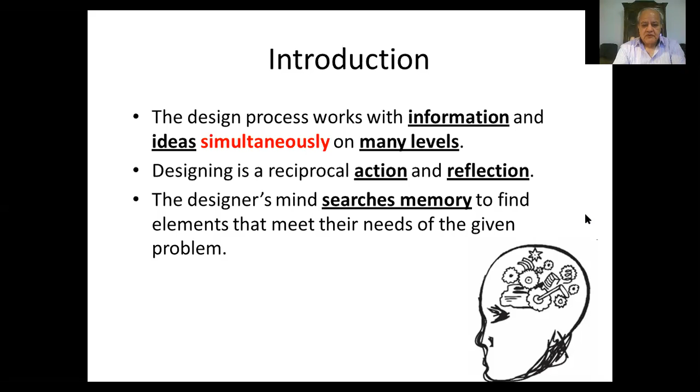So while we are working on the conceptual stage, it's like a puzzle. We never know what the building will look like or the idea will look like at the end. It's pieces of a puzzle that we try to put together and try to find what brings them all together in a meaningful way. How do they fit together? What are the missing pieces?

Do we have missing information about the site? We have missing information about the program. We have missing information about the client. If there are missing pieces, you will never get the full picture as you like to have at the end.

As I said, we go through different stages of design, and during the stage of the synthesis, this is where ideas are formulated. So the first thing is that we collect information about the site, the program, the data, examples, and then we go to analysis stage where we analyze this information and find out what will impact the project most and identify what are the objectives that we want to achieve. And then the synthesis stage, where all this information comes together in the form of the concept.

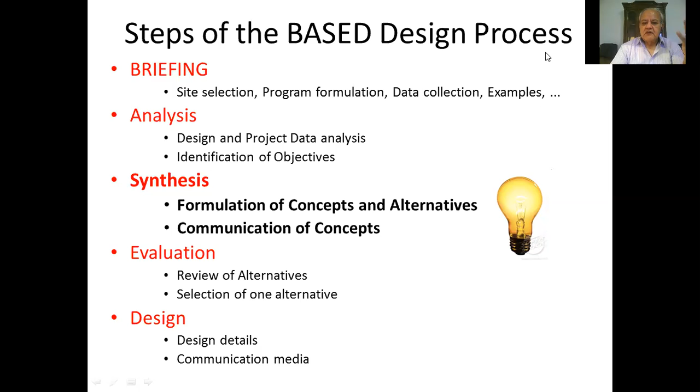But the key element in our work is synthesis. If we take the first letters of each of these stages, we'll find that they create the word BASED. So we can think about this as a BASED design process. BASED: briefing, analysis, synthesis, evaluation, and design.

So the BASED design method that we talk about starts with a briefing of collecting information about everything, and analysis, synthesis, evaluation. As we said before, we analyze the program, the site, the goals, the alternatives, and then we go to the synthesis stage, where we develop solutions and concept, form, and space, and provide that in a preliminary or schematic design. You can use models, of course, to illustrate your ideas. You can use some renderings and so forth.

And evaluation of these concepts to achieve the design. So analysis, synthesis, evaluation. If successful, you go to design. If not successful and none of the alternatives satisfies the client and the users and the needs, then you go back to the analysis stage. What is missing? What we need to do more, and how to improve our base knowledge so that the synthesis is better and complete.

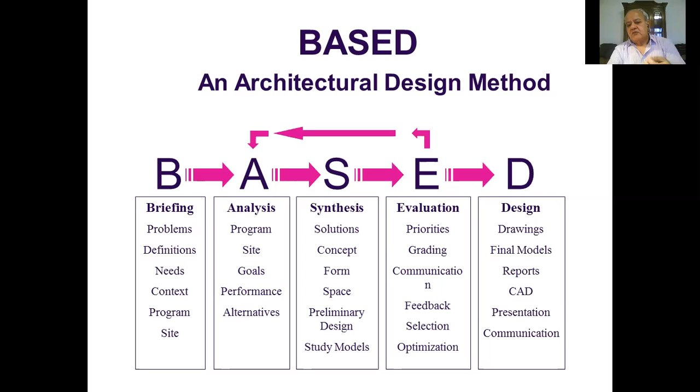So it's not a one-shot process. It's, as we said, action and reflection, until we reach a satisfying concept. Then we proceed to the design stage.

Concepts can come from different sources, unlimited. They can come from ideas of balance, if you are designing a courthouse, for example, or a governmental building or something. So the ideas of balance are represented in symmetry, nature, tools, ratios, level, justice, and can be a source of ideas for your concept. If you want to illustrate grace, maybe you look for how the dancing happens, flight, skills,

fluidity, focus, effort. If you are looking for complexity, you can look at integrated circuits of a computer chip. You can look at politics, ecosystems, planetary movements, fractals, music. If you are trying to illustrate knowledge, through learning, experience, crafts, skills, communication, memory, mastery.

So ideas can come from unlimited sources. And they must be related to your client interests, your site, your ambitions, dreams that you are translating for the client. So the ideas can be intangible, something very highly conceptual, as you said, ideas, human conditions. They can be tangible, coming from a certain object, and they can be combined and coming from different sources.

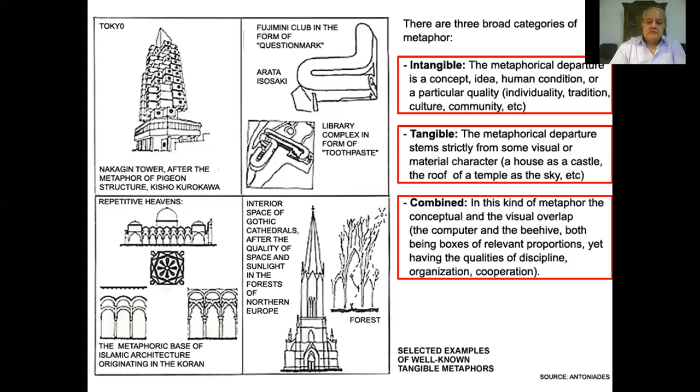So as we said, the ideas can be coming from a very intangible level, and they can be coming from very tangible, like imitating a certain shape or form, or a combination between the two. So you have to open your mind to everything. Try to find ideas from as many sources as you can, and sketching. The secret of concept creation is sketching.

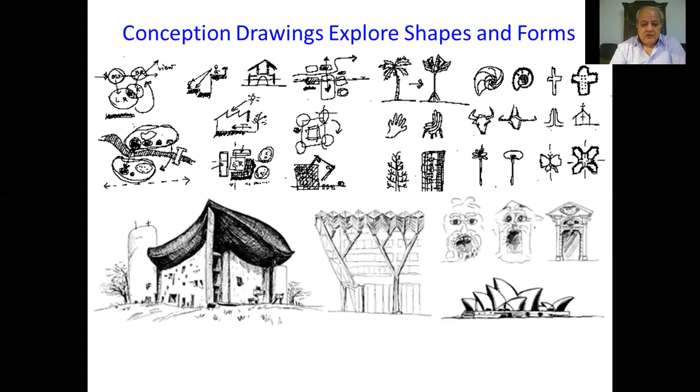If you have good sketching skills, this is very valuable at this stage, to keep sketching your ideas. Most successful projects were coming from sketches. Also, having a mood board is important. Collect some pictures, images, materials, so that you can provide this as inspiration for your client.

As we discussed yesterday, the site can be the main source of your concept, depending on the topography, climatic conditions, geography, demographic conditions, geology, and many elements. So your investment of time in the site analysis, site survey and information collection is very critical. Your idea might come only from the site, to relate it to a certain cultural background or buildings around you or whatever.

So you have to weigh each determinant and see what is the strongest. Is it the site? Is it the program? Is it a philosophical idea? Is it an intention? Is it the artist's work, him or herself? So there are many sources. So the site itself, the site conditions, the topography can be a very important determinant in creating the concept.

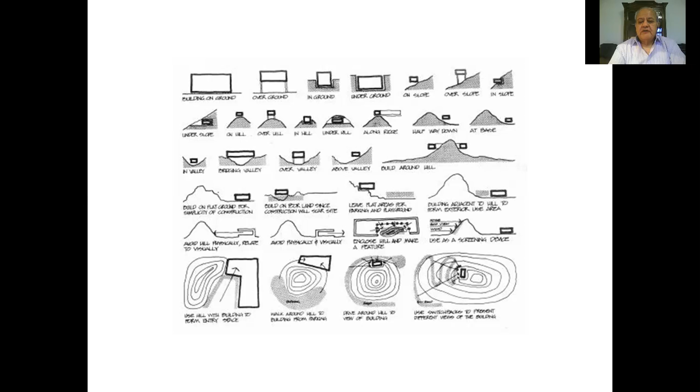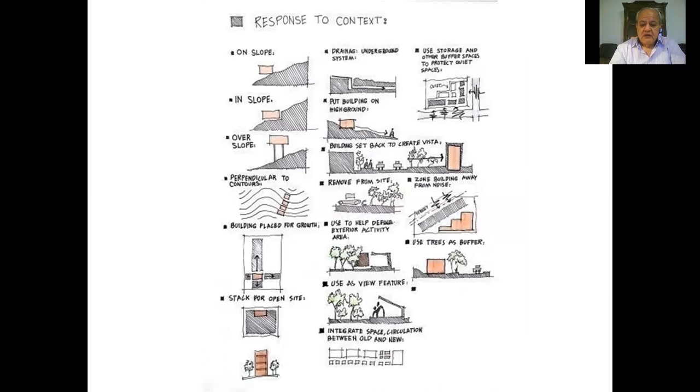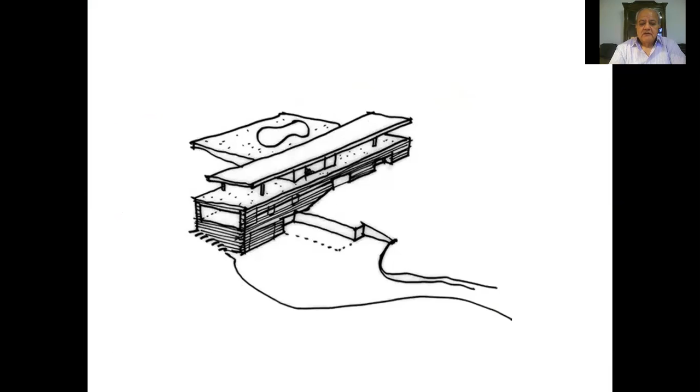How do you respond to the site conditions, the contour lines? Are you going to build on the slope, in the slope, inside the slope, or over the slope? Do you have vegetation around? How are you going to deal with that? So the site itself and its conditions can be the main source of the main concept generation. If you have excellent views around, maybe you need to have your project open to the nature around you and integrated with the topographic conditions.

So the influences on the design can come from different sources, and you have to treat each project separately. Every project situation is different, has different requirements, different limitations based on the client, the budget, the program, the cultural, environmental, technological, aesthetic context. Every project must be treated individually, not copied from other projects. So you have different challenges and opportunities.

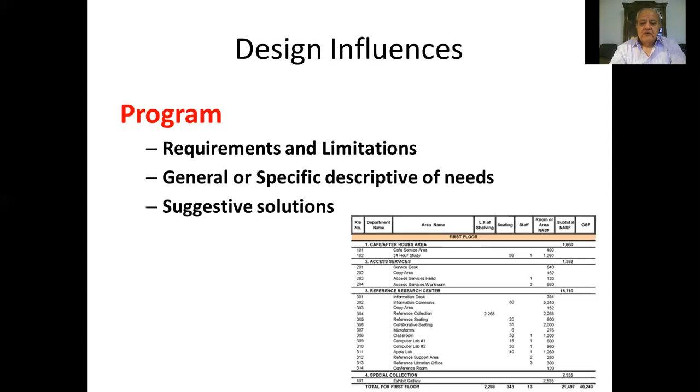The program can be a very important influence on the design. What are the requirements, the limitations, the areas? Do you need long span structures? Do you need high-rise structures? They can provide you with solutions directly from the program requirements. If there is a strong community around the project with specific requirements, you need to have meetings with the community itself. Community leaders, focus groups can provide you with important information and activities.

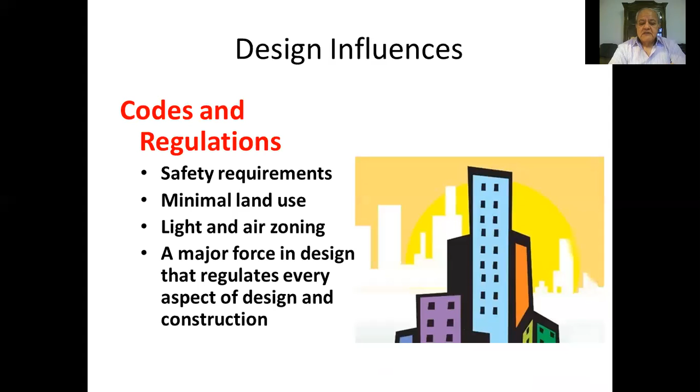Codes and regulations, of course, have major influence on the design. What is the allowed area for construction? How many floors? Setbacks? FAR, how many square meters can I build on this site? Parking requirements. All these will have major influence on the design.

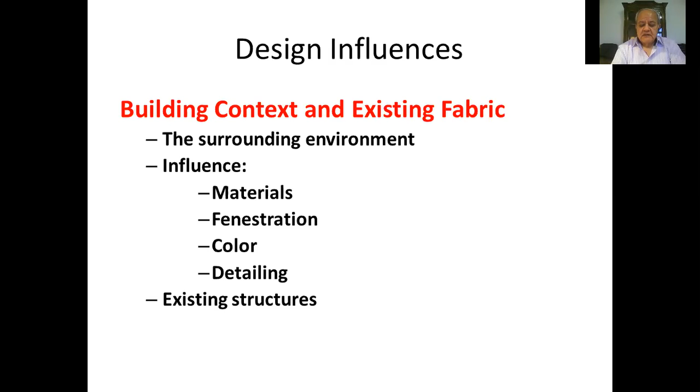Where is the building located? You need to understand what is the existing fabric around the building. What kind of buildings? Traditional, modern. How do you relate to them? Are you going to integrate with them, so you do something similar, or make something different? And why? You always have to think about why you want to do this. This will have influence on your selection of materials, fenestration, color, details, and so forth. So you have to understand the context.

As I said, site and climate are important considerations. The site has its physical characteristics, and the climate: wind direction, solar orientation, temperature, humidity, precipitation. How do you deal with these climatic conditions? Do you have snow? Do you have rain? Do you have sand?

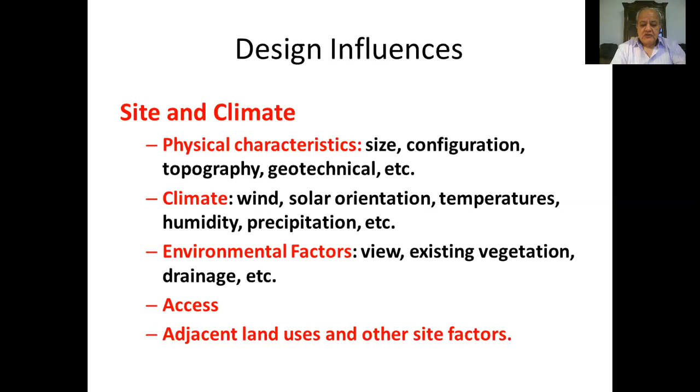The second item are the environmental factors. What are the views around you? Which direction? Do you have existing buildings or existing vegetation? How do you reach the site? What is the access to the site? Adjacent land uses. Many items coming from the site.

Building technology is also a critical factor, because now buildings are not only walls, floors, and ceilings. They are like small machines. We have air conditioning, we have lighting, we have internet, we have different systems that are impacting our building design from the beginning. And these are identified usually in the beginning of the project, in the briefing stage.

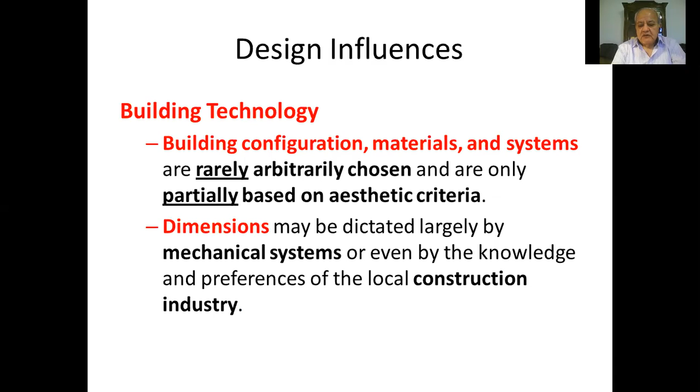The client might tell you about specific requirements. If you are designing a factory or a hospital or an airport, you have to consider all these building systems from the beginning of the project. Dimensions might be affected by the mechanical systems used, the construction systems required. Maybe the client wants to use prefabrication. Maybe the client wants to use standardized elements so that they reduce the cost. So you have to be careful about this.

Of course, the issues of sustainability, as we say, the 3 E's, environment, economy, and equity, are becoming major elements in the design now. And currently we can also add to it health, because health is becoming a major concern in any design, and that will impact the design industry in the future a lot. So you have to think about all these aspects of sustainability, and maybe the client will ask you to design the building from the beginning to achieve a certain sustainability grade, like platinum, gold, silver, or stars, or whatever. So you have to consider that from the beginning.

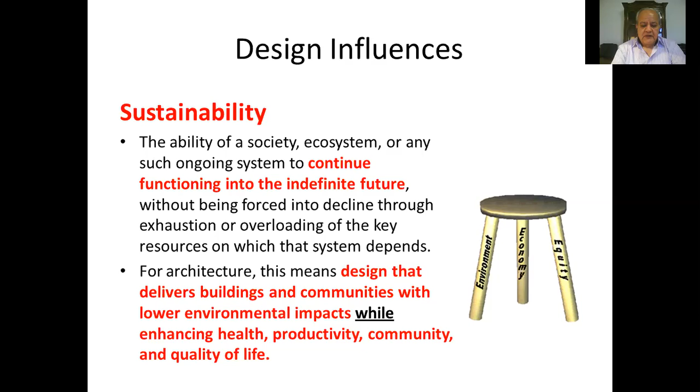Cost. Of course, in university, you don't think much about the cost. It's taken for granted, and you don't have to worry. But when you go to professional practice, you will find that cost comes sometimes the first item in the project. We have limited budget. Please reduce the cost. Don't make it cost too much. You will hear that a lot from your clients. So cost considerations are very important.

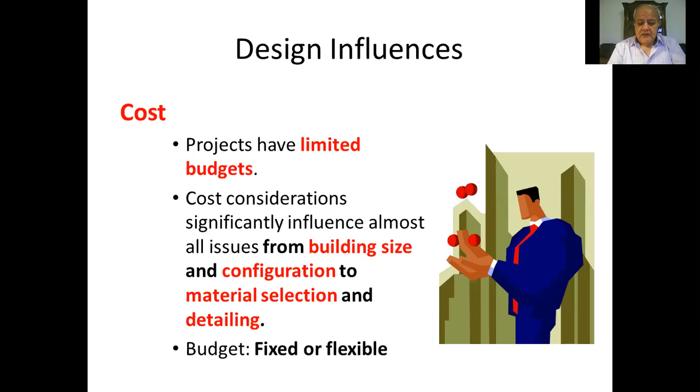You have to understand, does the client have a fixed budget or flexible, not open? No one has open budget. It's either fixed or flexible, so you can go up and down a little bit in the budget. Again, we want to stress that what you do in the beginning of the project impacts the cost a lot. You can optimize the cost of the project in the beginning, during the programming and the design stage, more than at the end in the construction stage.

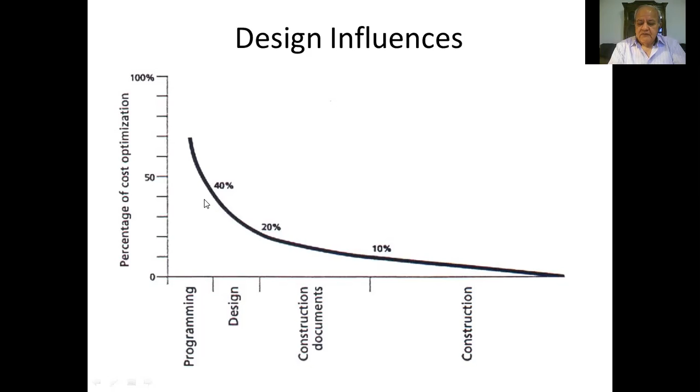So make sure that you spend enough time here, and the client should understand that the time spent at this stage is to optimize, not reduce. Don't use the word reduce. Use the word optimize the cost. There is always a cost. And we don't want to associate cost reduction with quality reduction. No, we want to optimize. We want to use the resources and the cost in a meaningful way so that we achieve the best results.

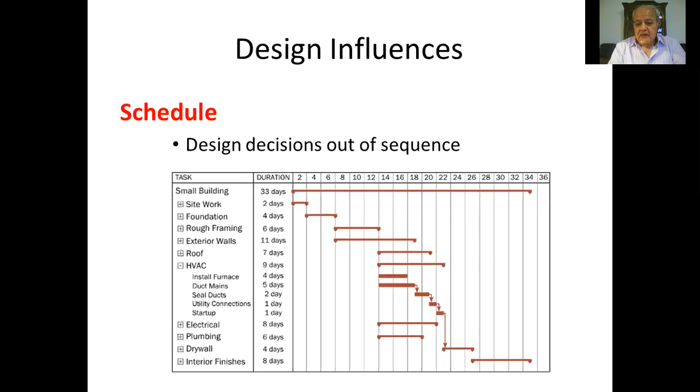Schedule. Sometimes you have a client who wants to build a school. So they want to start on a certain date, so that they furnish the school and start with the academic year. So you need to understand from the beginning, how will the schedule affect your design? When to start, what to do when, and so forth.

The client is always a major influence on the design. In professional practice, you always have to be communicating with the client. Don't disappear for 2 or 3 months and then come up with a good idea. It doesn't work. You have to be continuously meeting with the client during the design stage. Review your ideas. Make sure that you are in the right direction. Make sure that they understand the consequences of any design decision in terms of cost, in terms of time, in terms of complexity, and so forth.

There is no one good client. Some clients might come to you with a program and budget and all the objectives of the project, and they want you to just design. Others, they have no idea what to do. They might have budget, but they don't know what to do with it. So you need to find site and program for them and objectives. So there are different types of clients, and you have to meet the client several times in the beginning to understand what is the nature of this client and how you can work together to achieve the best results.

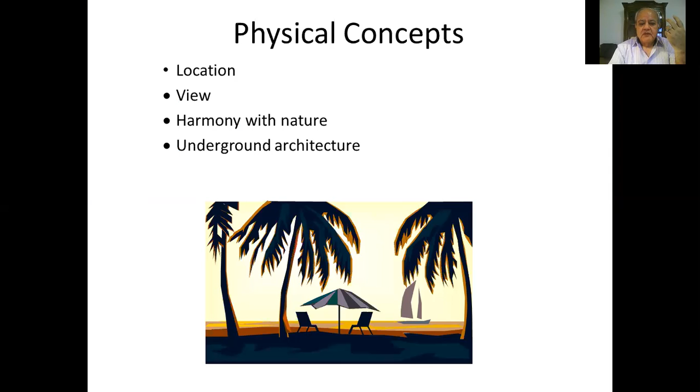How do we relate to the natural elements, to the views, to the architecture that is already there. Of course, there are many well-known sources of concepts from nature, from beehives, from seashells, from the sand dunes, from waves. All these are kinds of sources that are coming from nature. They can also be cultural. If you are designing in a historical site or traditional site, you have to consider all these elements.

Religious factors. If it's a religious building and has some significance, you need to think about the religious factors, the social factors, people who will be living in that area. Economic factors. What is the economic standard for the project? Is it a shopping center, high class or middle or low? How do you design for each one of them? Political factors. What kind of political statements need to be illustrated in the project?

Functional factors. You might have different functions. They have complex relationships, and you need to think about them. Spatial relationships might also be a source of the concept. What kind of spaces do you have? How do they relate to each other? How do you connect them together? Same level, or use different staircases and different elevations, different heights. Do you have the same height for all elements? Are they all 3 or 4 meters, or do you have areas that require 6 or 12 meters? So how do you bring them together?

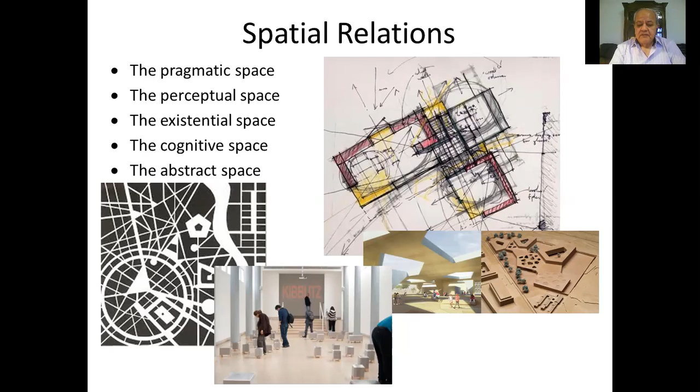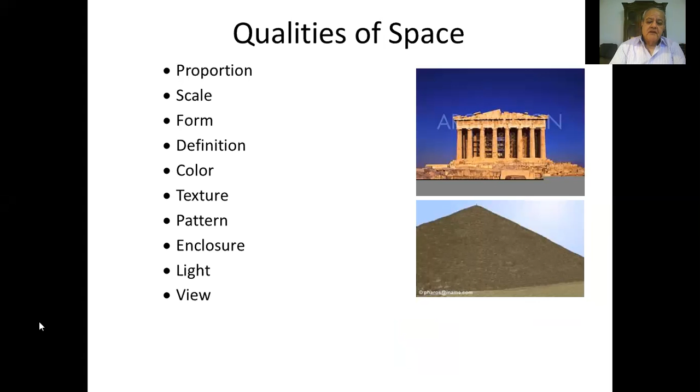We have different types of spaces. There is the pragmatic space, the physical space. There is the perceptual space. How will people perceive the space and walk through the different spaces? Existential space, cognitive space, abstract space. So all these are different ideas coming from the spatial arrangement. Of course, the space has qualities related to its proportion, width, length, and height, scale, big or small, form, definition of the space, the color, the texture. All these elements affect the quality of the space.

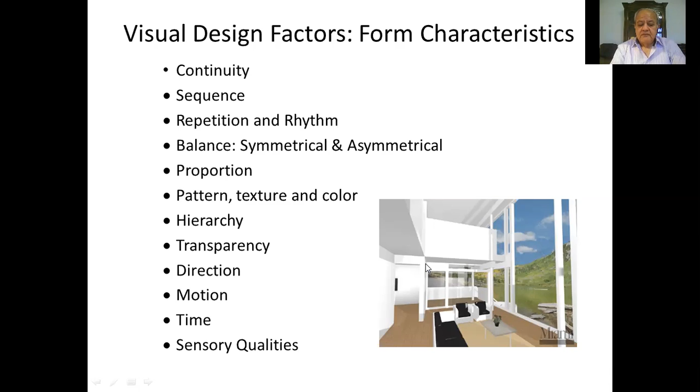The visual design factors. How do you put these spaces together? What is the sequence of the spaces? How do you provide continuity and fluidity between the spaces? Are they symmetrical, asymmetrical? Their proportion, are they all the same proportion or have different proportions? Pattern, texture, color of spaces, hierarchy, transparency, direction, motion, time, sensory qualities. All these are elements that affect the design.

We can also think about our visual perception. How do we perceive spaces? We have different theories of how we perceive spaces in the city, in the building, and in one room. There is the famous Kevin Lynch theory of the image of the city and theory of place, where he identified certain elements that allow us to understand or to perceive the spaces that we live in.

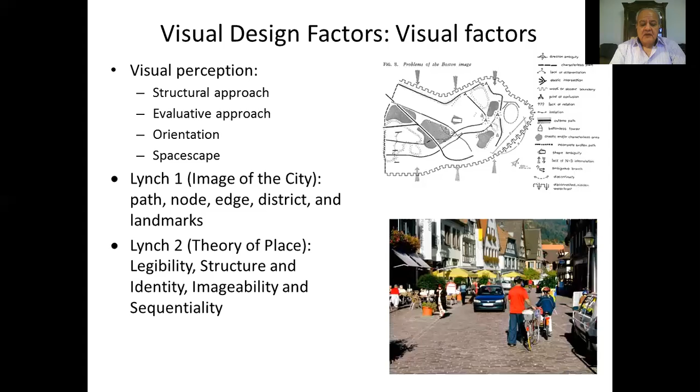Gestalt psychology or theory is very important for architects to understand how drawings impact how we see the world. The emojis that we use nowadays are also part of this. These elements, when they are arranged together, can create a meaningful symbol. Visual organizations, we all know the figure, ground, surface, edge, outline, object, things that relate the objects to themselves and to each other.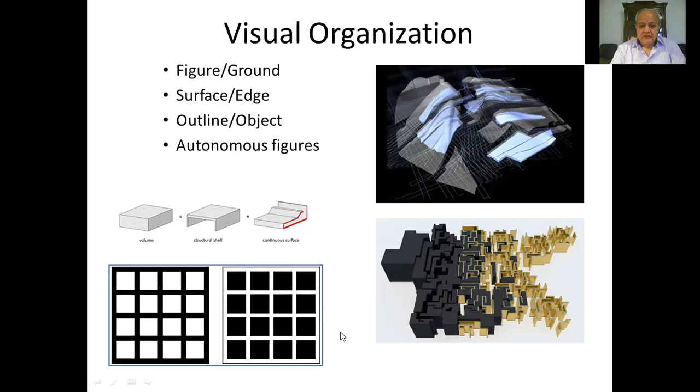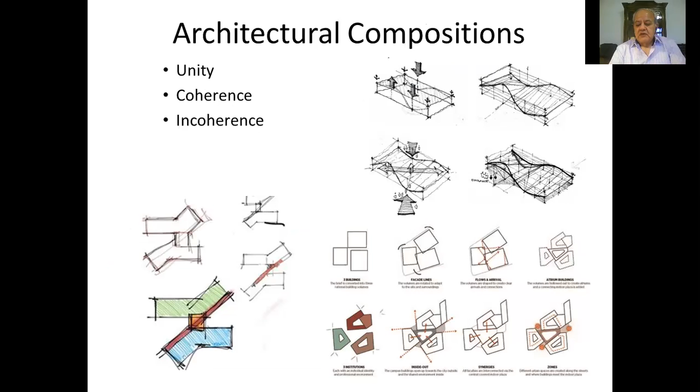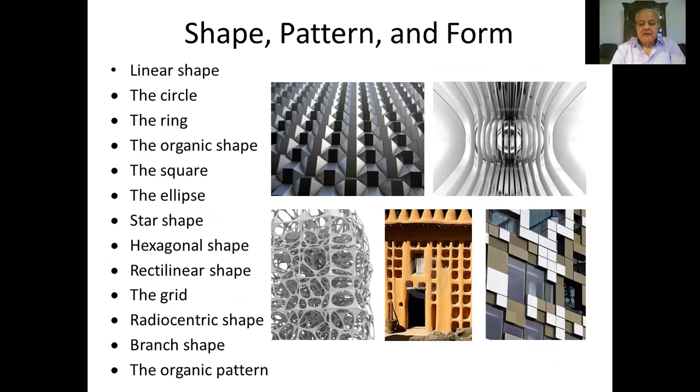We have architectural compositions. We can start from very pragmatic principles of architecture and start to manipulate the form to achieve what we want. We have linear shapes, circles, rings, squares, stars, hexagonal. All these are architectural principles that we can base our design on. The size: in the postmodern architecture era, we used to use the size and the scale as one of the elements of design. By changing the size that we are used to into something different, it creates a different experience.

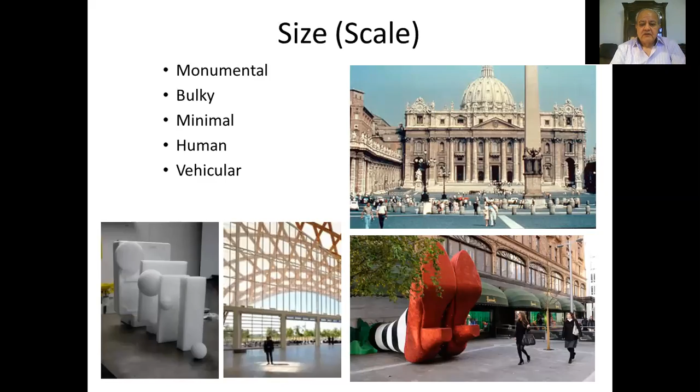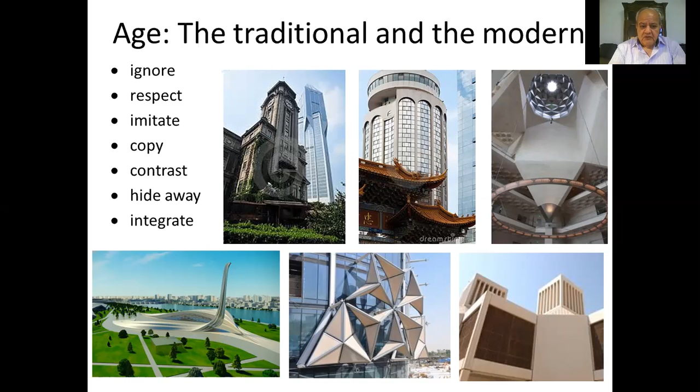Color is extremely important. If you're working with an artist, a painter, the issue of color is important. How do you integrate it in their design? So you have to go back to your profile of the artist that you thought about or selected, and get inspiration from what they do in your concept and design. We can have age as a concept generator. Are you using traditional or modern, or a combination between the traditional and the modern, or contrasting the modern and the traditional? So this also can be a source of inspiration.

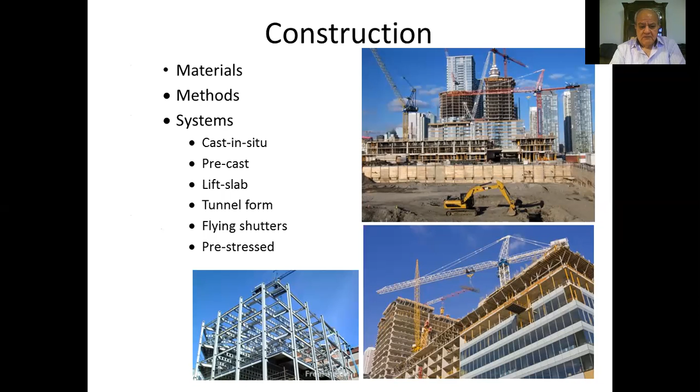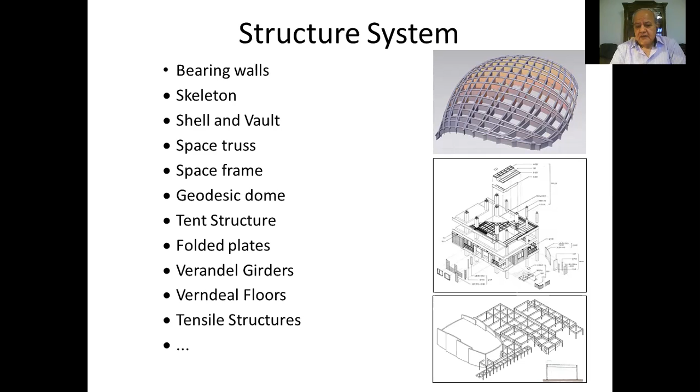Construction system can be a major element. You might depend on the construction system and focus on how it is used. If using tunnel form, lift slab, flying shutters, how does this construction system affect your design? Structural systems. Also, if you're using a special type of structural system, it will have a major impact on the concept. So we have to look at everything that might impact our design. You may want to have some Arabic Islamic design inspirations from the courtyard, the alleyway, the plaza, the kasbah, the mashrabiya, all these elements that are coming from our Arabic and Islamic traditions.